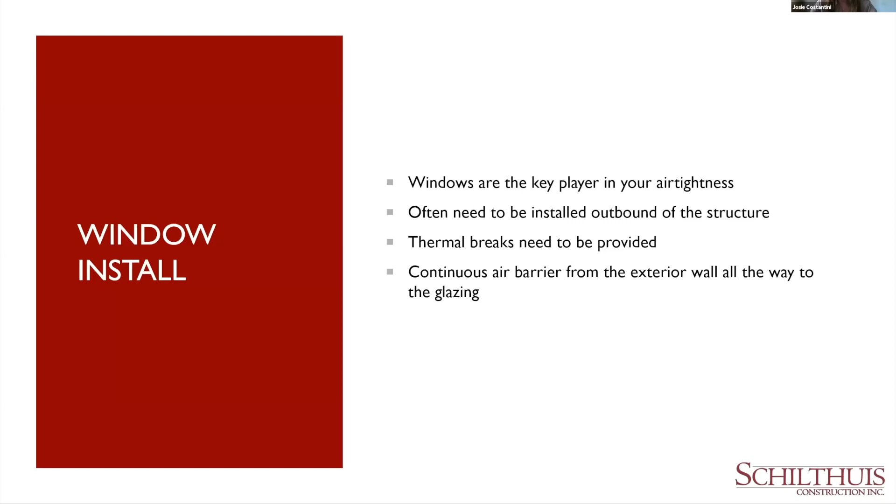So we're going to start off with conventional steel. This here is a building in Hamilton, Ontario. It's a multi-unit residential building with a few commercial spaces on the ground floor. It was about 45 units, I think about 50,000 square feet, 3 stories. And in here we had low-income residents, and on the ground floor, I believe we had a convenience store and maybe a library. So this is our conventional steel install of a window.

So what we have here is a window supported by fiberglass angles, the green angles you see there on the side of the window. So for this install, we needed our window to be sitting outbound of our structure so that it could sit in line with our exterior spray foam, because you want to have that continuous layer of thermal resistance.

So this was our first building that we ever completed, passive house. So there was a little bit of a learning curve here with figuring out how exactly to seal this window unit. We went back and forth and we kind of came up with the detail that ended up being a little bit redundant, which I'll go over in the next detail. But I'll just show you a few things here.

So on the left-hand side, you can see we have our blue skin layer for our building. And then we have blue skin again going over top of our fiberglass angles and into the window. And then on the far right-hand side, this is just pre-taped. I think we were doing a mock-up. You will see that we have high performance tape that will then connect the blue skin to our window frame itself. This particular one was at the bottom underneath our weep holes.

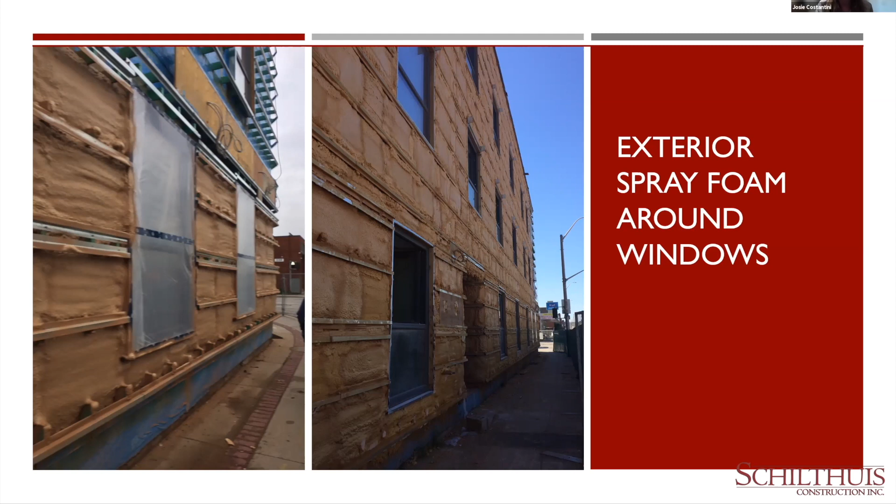So another conventional steel building I wanted to share. Just in case I didn't mention, we had cold formed steel with structural steel stud and precast hollow core slabs. So that's what I mean when I say conventional steel build. This is a similar building to the previous in its structure, and it is 4 stories. It's about 50 units, I believe.

Same, it's multi-unit residential. On the ground floor, it's actually a church. So they were connected to a church building, all in one envelope. It was all certified under PHI. They weren't separated out outside the thermal envelope. And this unit was unique because it had a gymnatorium in it.

So same thing with this window, we had to do a mock-up. What we did here was we just did this in our shop, but we came up with a better detail on this window. We used what we found is a double-sided tape. So instead of doing that double layer of blue skin over top of our angle, instead our air resistive barrier was all on the interior. I'll show you more pictures of exactly what I mean.

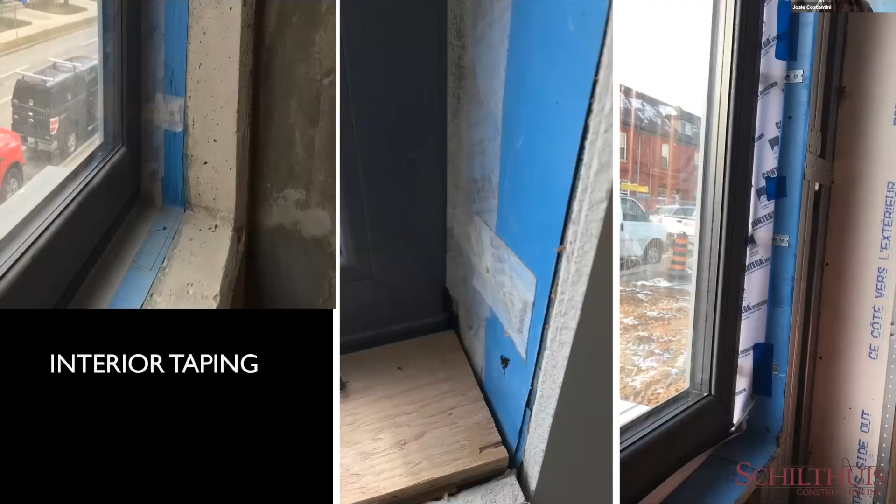On the left-hand side, you can see our blue skin is still wrapped inside of our window opening in our mock-up here. And on the right-hand side is our window being pre-taped with the double-sided tape. So here we have our blue skin wrapped on the inside of our window opening. We have our double-sided tape stuck to the side of our frame. And then with the other side of the tape, we stuck it right onto our blue skin.

So the left 2 pictures show it finally installed, and the right picture just shows us after we placed the window in, and we just secured down our double-sided tape until we were ready to tape it. I'll touch on that a little bit later, about holding off doing your final taping until you're ready to finish your walls.

And on the left-hand side, you can also see that securing your window from the inside comes with a little bit more trouble in terms of how you're securing your window structurally. So we have the clips that just snap into the frame and are secured into the opening, and we had to tape over these as well. Not a huge deal, still a lot less labor than our previous iteration. So this was a lot simpler and a lot cheaper in terms of labor. Somebody just had to go around and add some tape for the clips.

And the nice thing about this in terms of sequencing was that we can get our exterior blue skin supplier and installer to come and install the entire exterior of the building. And then we can come and do our windows whenever we would like, and we don't have to get them back. They're not involved anymore. We have our interior tape, and whenever we are ready, we can secure that. Nobody has to come back, and we're not waiting on anybody.

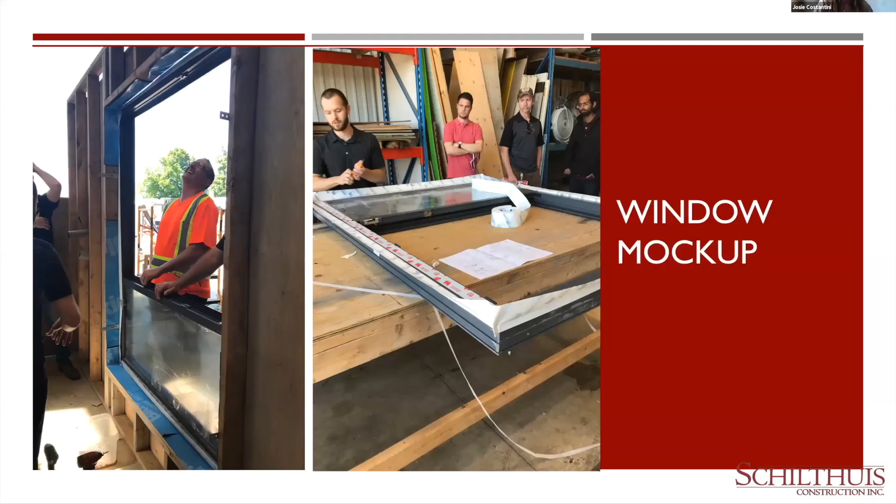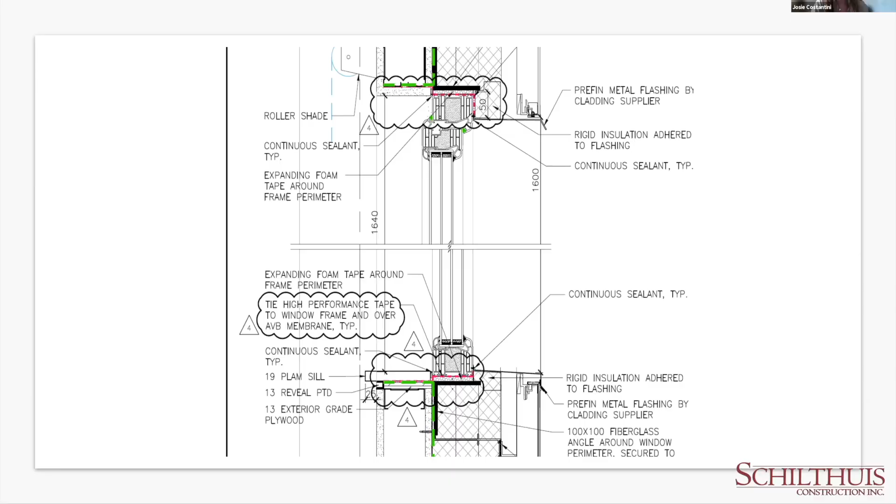Wood structure. Now we move on to a building that we just recently completed that is completely wood for the most part. So this was a 4-story building, multi-unit residential.

On the ground floor, this one had a library and I think some offices and community spaces, if I'm not mistaken. It was about 50 units as well. This one actually is next to the first building. They're on the same lot. And this one was completely out of wood. So with wood becomes a completely different experience.

We could have used the fiberglass angles that we did in the previous buildings, but we wanted to try something new. So what we did here is we constructed a window buck, which was completely made out of plywood. And these were pre-painted before installed. They were pre-painted in a liquid air barrier. So on the left-hand side, this is our window mock-up. You can see the frame around the window, which is the window buck. So these were completely pre-fabbed, if you want to say, in our shop.

We would cut them, assemble them and paint them with the liquid air vapor barrier, and then we would install them in the building. This again was easier on sequencing, as we could pre-make all these window bucks, and as soon as our openings were ready, we could stick them in where we needed. And then the same thing would go for installing our windows. On the right-hand side, it's just an interior view of that window buck.

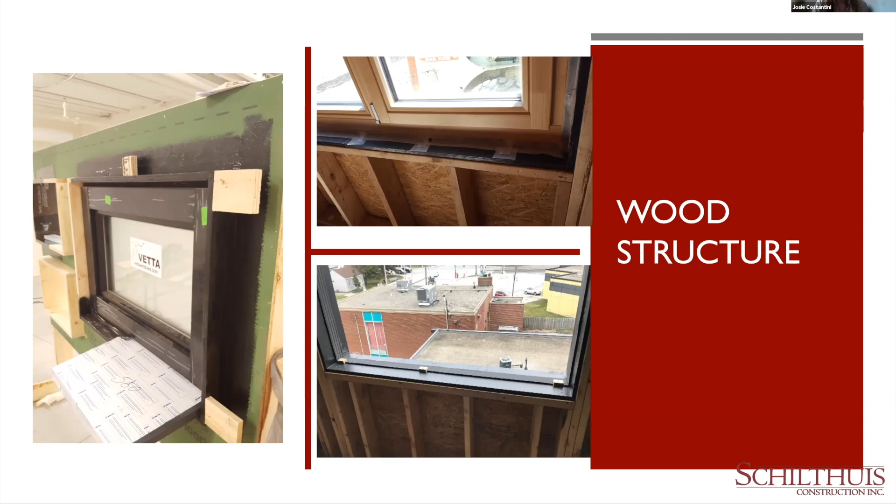And the top right-hand side, you'll see almost the same taping detail that we saw in the previous building, where it's interior taped, and you can see that the clips for holding the window in structurally are also taped over to all connect to that liquid air vapor barrier, which is the window buck. So let's look at this detail here.

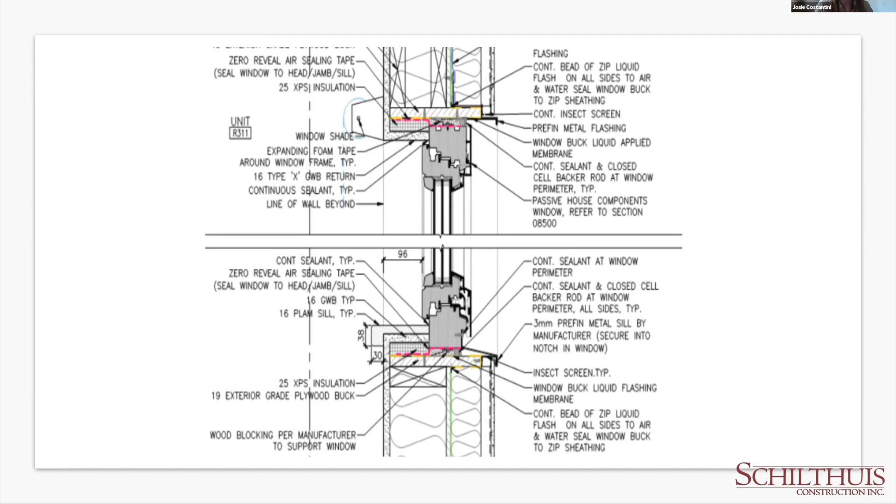So what we did here is to connect our window buck to our air barrier on the outside. We used ZIP stretch tape here, but you could also use, like on the far right-hand side, the paint-on air barrier. We just found that because some of the openings were not as exact, there was a little bit of a gap. So we felt more comfortable taping the window buck to our structure.

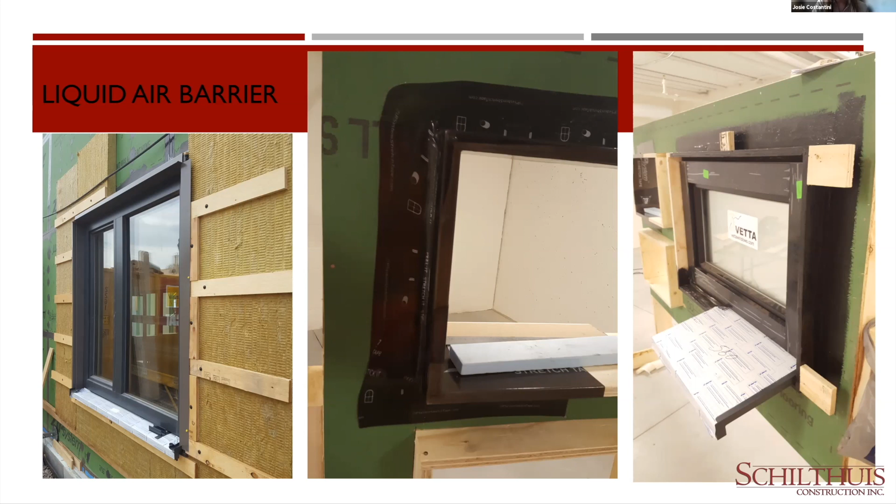On the left-hand side, you can see, similar to the building that was spray foamed, this one has mineral wool insulation on the exterior, and this window is also sitting right in line with that thermal resistive barrier on the outside. Again, another reason why we use the window bucks is so that we could hold our window outside of our structure. And finally, precast.

So we just are in the midst of occupying a total precast building. Total precast meaning it is all made in a factory and it is completely concrete. The floors are concrete and the panels and the walls are concrete. So what this means is we have sandwich panels: a layer of concrete, a layer of insulation, and then a layer of concrete, all sandwiched together, tied in with rebar. I believe they used fiberglass ties, and it is continuous throughout the building. So there's a continuous layer of insulation.

This was a new experience for everybody, so it was a great learning curve. This one is about 50 units as well. It is 70,000 square feet, and there are ground floor commercial spaces, which is the YWCA. So there's a senior center, there's community spaces, there is youth spaces, offices, training centers. Yeah, and it is all part of your passive house air barrier and thermal barrier.

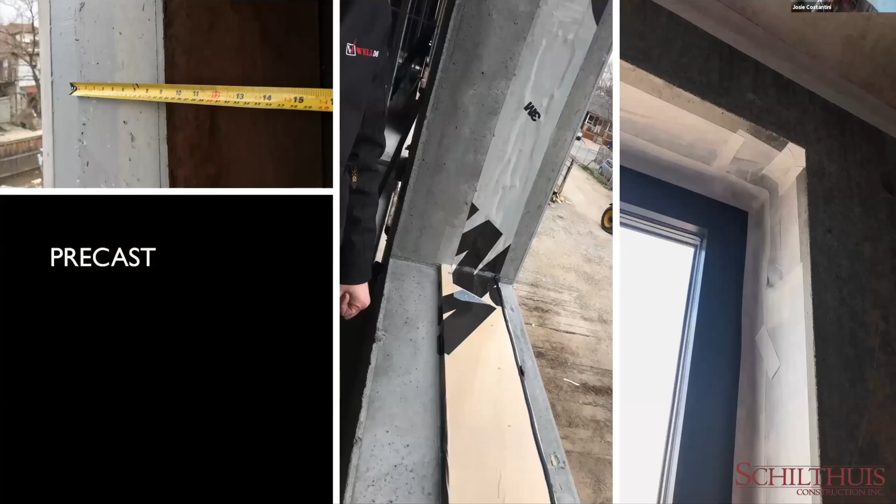So precast, on the top left-hand corner, this is just a picture of what our panel looks like, sliced open. This is at our window opening. You have the exterior layer of concrete. You have the little bit of insulation there that you can see. It kind of looks like it's painted over. It's that dark charcoal stuff there. And then you have your interior layer of concrete.

So we were measuring this to make sure that we get our window exactly in line with our insulation layer. As I've stated many times, you want it right in line with your thermal resistive layer. So we're measuring to make sure that our window is in the same amount as our insulation. Middle picture shows how we sealed this. Because it is a precast building, the exterior, as you can see here, it's being painted, is final finish. There is nothing being added.

You don't have the added luxury of having flashings that return in to cover anything on the exterior that you need to tape to or anything like that. This is completely finished on the exterior. So we couldn't have Blueskin wrapping in our opening or anything like that. So what we did is we used a high performance tape to tape the insulation all the way around, as we did not want that getting water damaged if there was any pooling of water.

And then we installed almost the same detail that we did on our last two: we taped from our window frame right to our opening. It's as simple as that, because our barrier was over the insulation and we have total concrete. Our air barrier was our concrete. All the joints on the inside of our building actually were taped. So we are essentially connecting our window frame from the inside onto our barrier, which is our interior concrete layer.

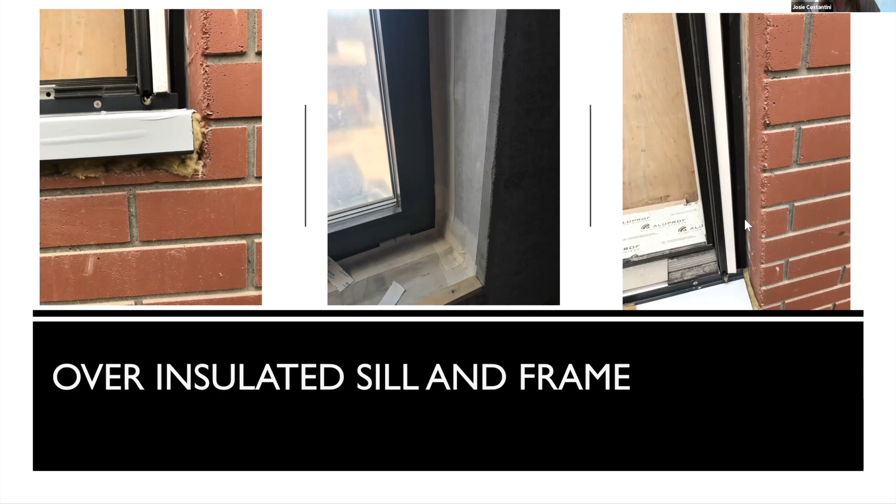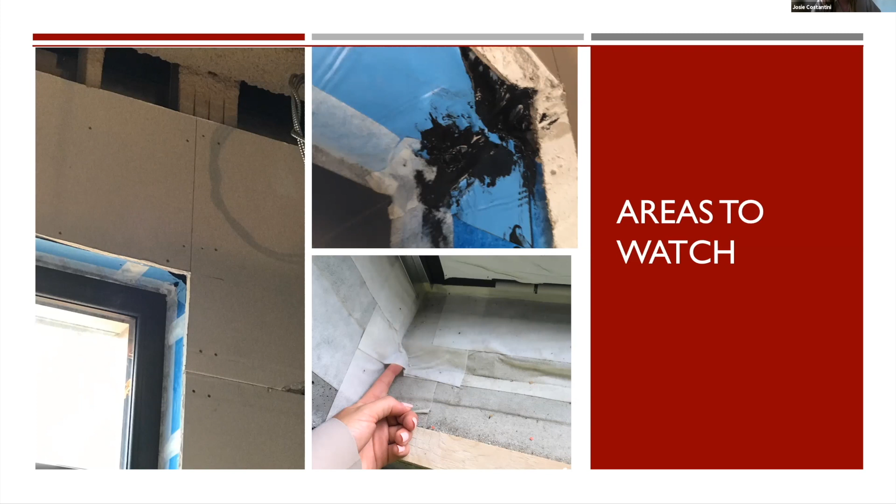Although you can tell that there's a couple layers of tape here, because typically we do a couple layers in the corner just to make sure none are gaping. So it could be sealed underneath, but you can never be too careful. So just stick another piece over there and make sure it is completely sealed.

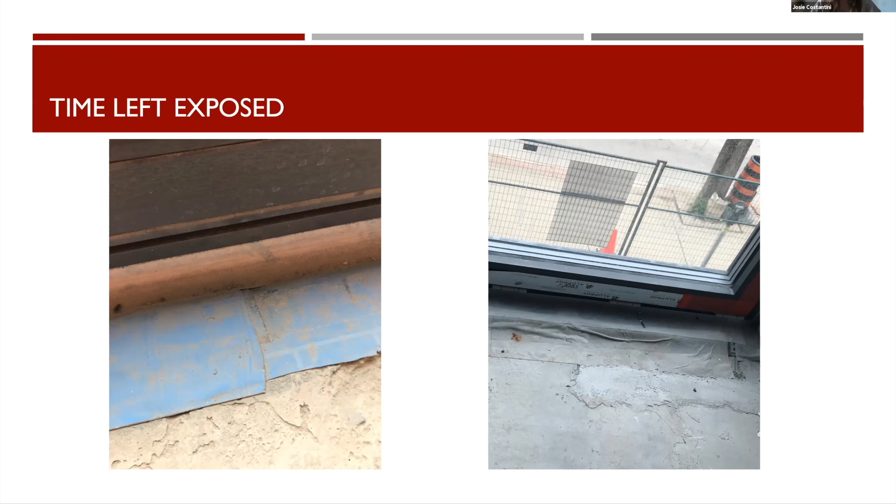And this is a nasty picture I thought I would share. This is the corner of our very first building that I was talking about, where our detail seemed a bit redundant with all the Blueskin and taping going over. So this is the bottom of our window. That orangey colored stuff is a mastic as well that we use to seal up some of the blueskin fish mouths if there's holes in them. So that's what that is under there.

And then you can see we have many, many layers of tape. It looks like there is one going under the window sill and underneath. Then you have another patch, a dark blue patch, and then you have the light blue tape connecting your blueskin to your window on the right-hand side. So yes, there's probably no way this is leaking now, but this is very messy and not necessary. I mean, these tapes aren't cheap and neither is the labor to put them on. So I imagine this little corner here probably costs a lot more than anticipated.

So getting the right detail and the right installers, of course, make it a lot easier. The right detail makes it almost foolproof to install. So this detail was very difficult. Not to mention, I forgot to say earlier, I don't know if anyone noticed, but the only detail where the air barrier was on the exterior completely was our first building, our steel construction building. So this air barrier is completely on the outside. There's nothing on the inside. So this actually ended up sitting out for probably about 6 months. And we had to go around and retape a lot of things because we didn't end up finishing the exterior siding as soon as we wanted.

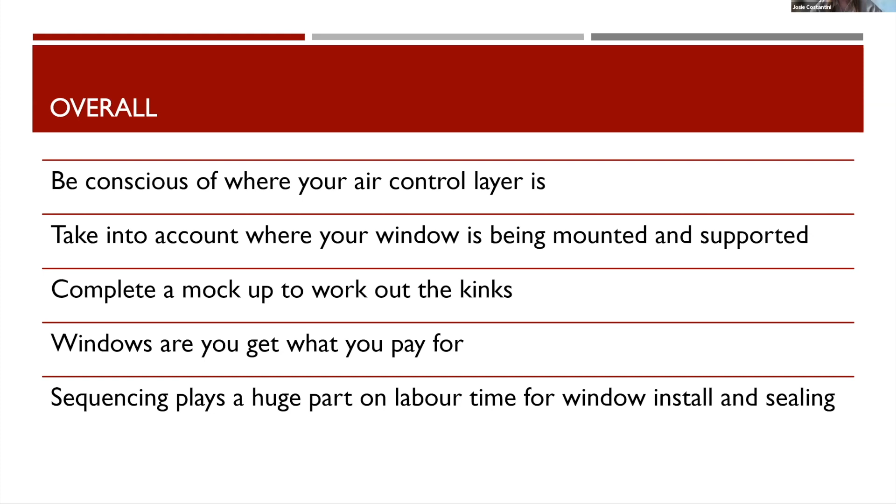Quality of windows, that's just another topic I can talk to. And then sequencing plays a huge part on labor time for window install and sealing, as we just talked about.

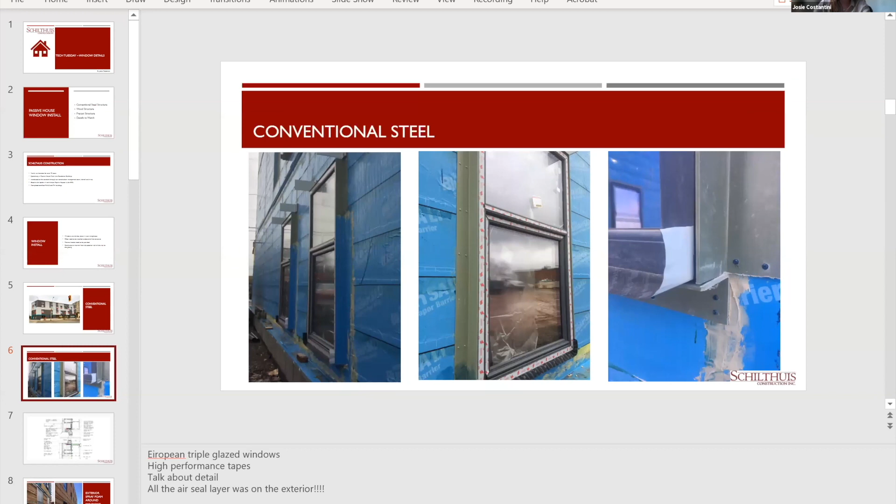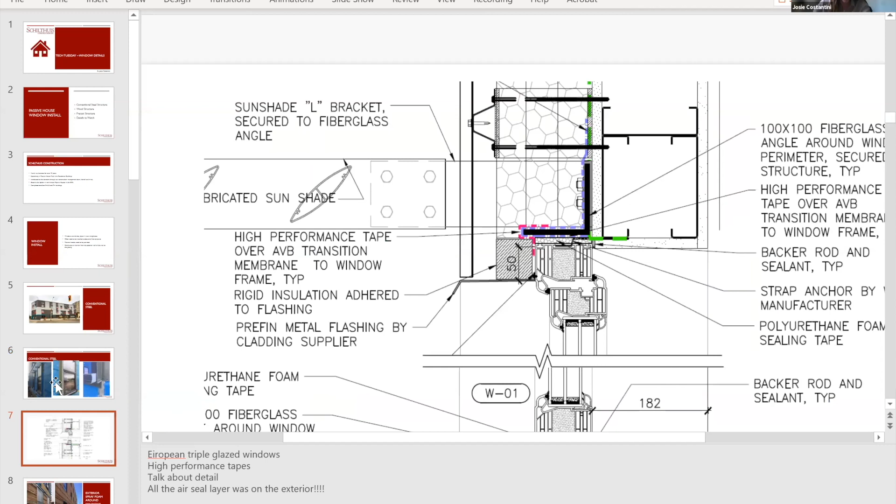Yeah, so here, I'm assuming he's talking about, oh, I'm moving it around now. I'm trying to get closer. There are tiny holes right above this tape. They actually might be covered by, this is kind of the seal that comes when you ship the windows so they don't get damaged. There are tiny drainage holes above this tape here. And so then they would drain. That's why we did our tape under here. And then we had a sill kind of right at the ledge of our fiberglass angle there.

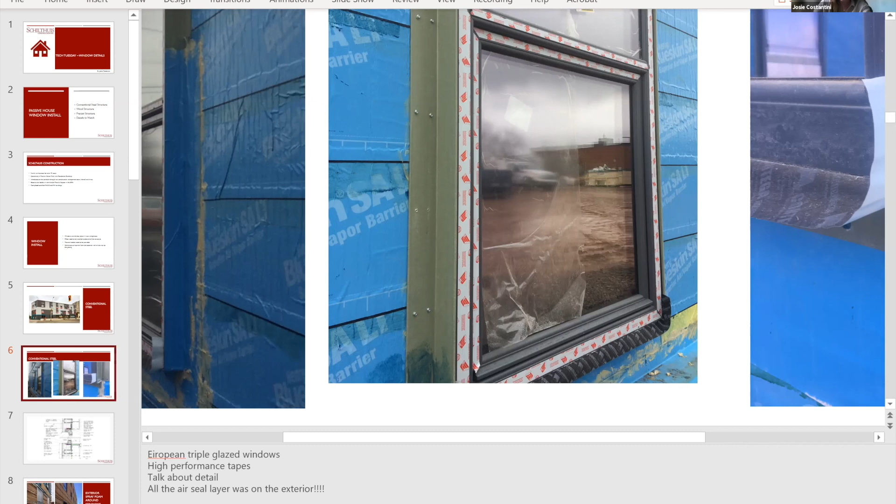So yes, there was drainage, but if there's not, I'm very concerned. We're always looking for those drainage holes, and lots of the time they are in the same spots, kind of in the bottom here, but I have seen them underneath before, but these ones are in the face of that window. Perfect, thank you. Mark, I hope that answers your question.

Our next question is from Hans. Yeah, my question was actually about the first building. It didn't appear like you had insulation on the inside of that structure. So it was just exterior insulation? Yep. We only had insulation in the partition walls for STC rating. Insulation on the interior wasn't going to do much. I think they only did it for sound. They didn't do it for any other value.

Like we had all kinds of steel and block and everything in there. Insulating in between those steel studs on the inside was for pure sound. We did 6 inches of spray foam on the outside. So I'm not exactly sure what our R value was there, but yeah. I guess the steel would have had too many thermal bridges in that layer. You got it.

I didn't do the calculations on that one, but I'm assuming that they calculated it out and it probably wasn't worth the cost to install it. They probably were getting very, very little of an R value and not adding to that exterior insulation. I'm sure that's why we had to do 6 inches on the outside, to make up for that loss on the inside.

Cool. This is an existing building too, so we wouldn't have chosen that, but we kind of had to work with it. Cool. Excellent. Thanks. No problem. So your first passive house was an existing building? Yes, it was a retrofit.

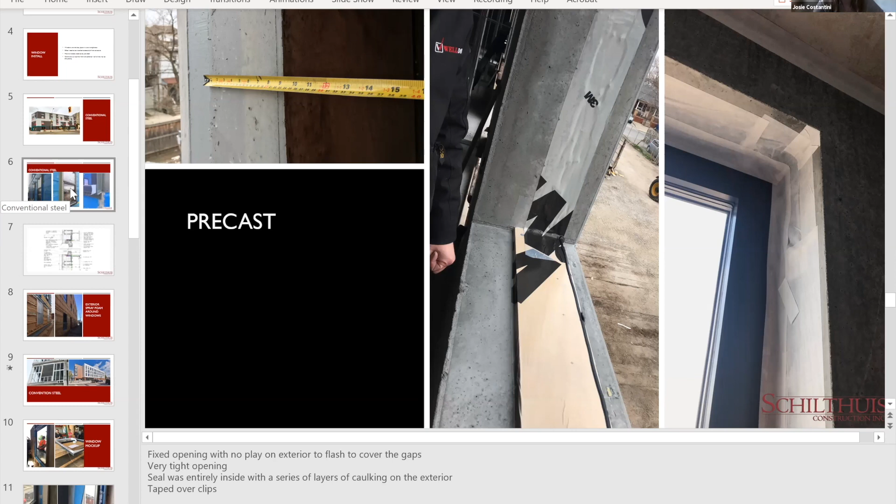And then to answer the second question, this was actually the only building where our tapes were outside. We know things like blue skin and zip board can be outside for a certain amount of time. They give you a range, and it's usually pretty long. This was our first Passive House building, so they were actually specified. We had a consultant helping us, and these tapes could last outside. They definitely had a long length where they could be out in the weather.

They were waterproof, but that doesn't mean that you should leave them out there for extended periods of time, even though they can last, if the install is not perfect. It didn't go perfectly well. There were a lot of different players in it. If some corners were open to begin with, water gets in there and they just start flapping, and they weren't secured to begin with. So yes, of course, we always look at the time length that they're allowed to be outside. We didn't plan to leave them out for 6 months, but sequencing, and here we are.

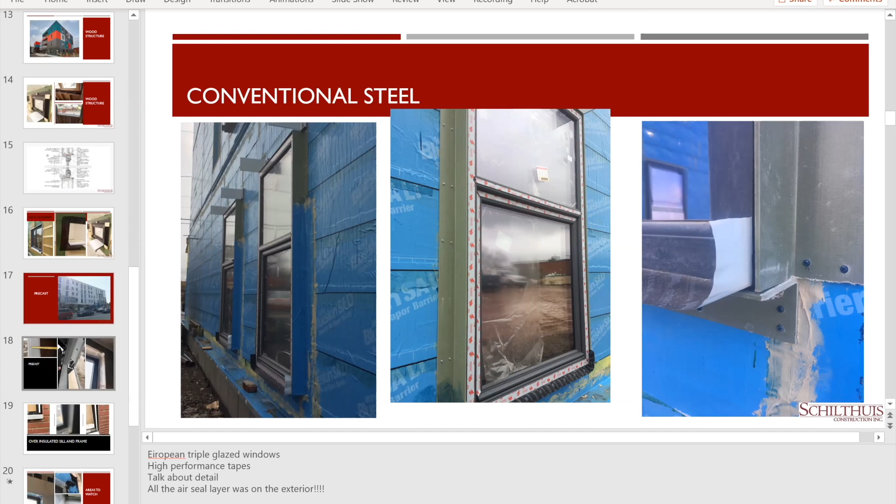Perfect. Thank you. Our next question up is from Ellen. Hi. I'm trying to find my question. Oh, about the buck. Now that wasn't my actual real question. My real question was about, I have a little snapshot of it that I kept.

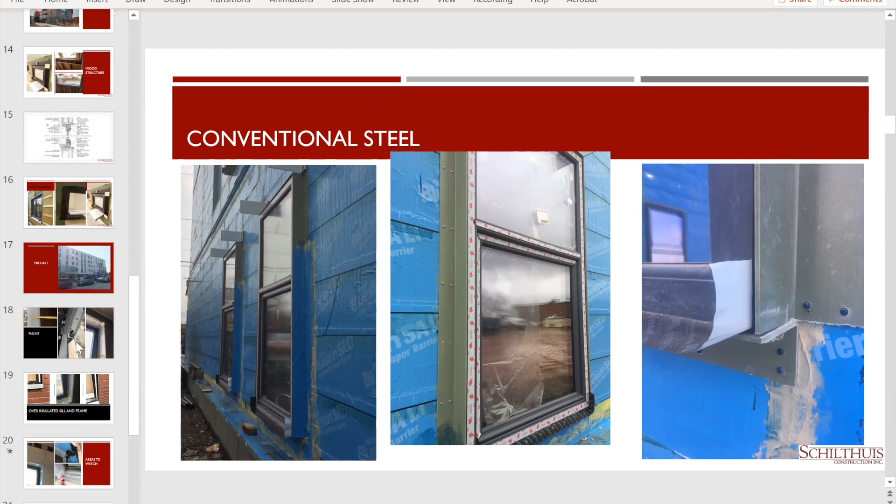So yeah, that's one of the areas I'm struggling with, because I've got a client that has contractors who are telling him something different from what I'm specifying, and I'm trying to make sure that on the head of the window my air barrier is sealed and everything is sealed from moisture coming out from the plywood sheathing, and the air barrier is sealed from there all the way out, whether it's with flashing or tapes or whatever, to the exterior, and everything is able to drain somewhere.

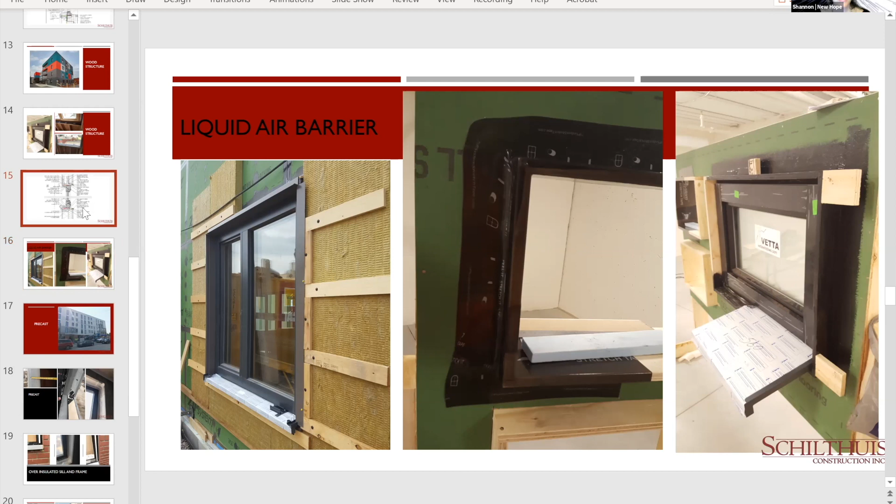And I think we should save the conversation with Ben about the 3/4 inch ply for the after hour, because it would be great to ask Josie who is someone that maybe inspired her to get into this as deeply as she does. Josie, did you have a mentor or someone that you might be able to share with us who got you started?

Well, I briefly mentioned at the beginning, but with construction management, we often team up with architects and owners at the beginning of a project before it's more or less designed, so probably about 5 to 15% drawings. So the architect, Envisage Architects, her name's actually Emma Cubitt, herself and Indwell, which is a nonprofit organization that builds low-income housing all over Hamilton and surrounding areas, they teamed up and they decided that they wanted to do all their future buildings in passive house.

So they invited Schilthuis and myself to take the training course with them. So I took the Introduction to Passive House Principles back in, I want to say 2016 or 2017. We all took it together. Some of them wrote the exam. And from there, we've been their go-to contractor. We kind of have an ongoing standing relationship with them.

So if it wasn't for them introducing me to Passive House, I don't know if I ever would have done it. And then as soon as I dipped my toe in Passive House, I went and got my master's degree in building science, all because I kind of learned how to build better. And it pains me whenever we get projects that aren't Passive House. But yeah, if it wasn't for Emma and Envisage and Indwell wanting to take this step, I probably wouldn't have done it either.

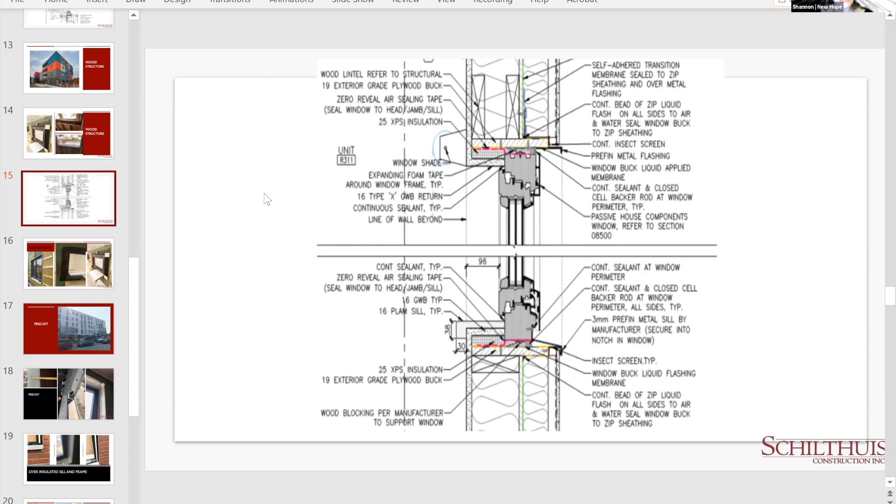Thank you, Josie. That is awesome. And we want to thank her too, because now we get the benefits of all your good work after she inspired you. With that, we hope you can stick around during the after hour to keep answering questions with us. And in the meantime, we will hand it off to Zach. Thank you, Shannon, and thank you, Josie.